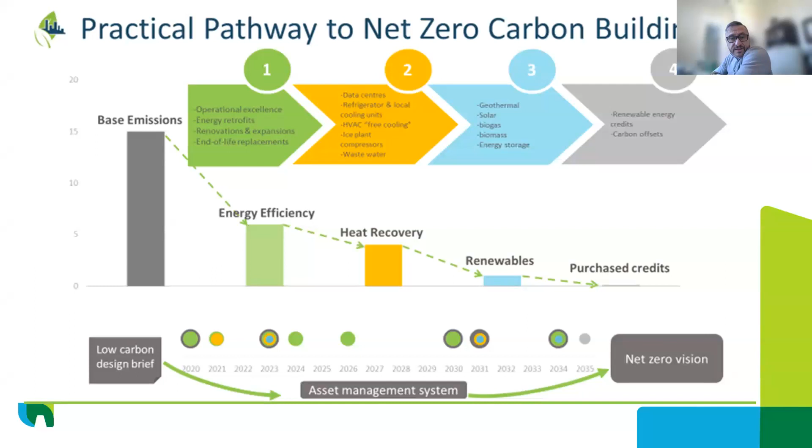So the objectives of the pilot started off with setting carbon reduction goals for these pool facilities. Each of the municipalities had slightly different goals, all meeting the minimum requirements for the FCM funding for feasibility studies of low carbon plans. We used a zero over time carbon approach, basically doing it over the 30-year period, and we presented a solution, one of the pathways that aligned very much with the equipment end of life, renewal and replacement.

In order to evaluate the low carbon opportunities, we compared it to a business as usual, and we'll get a little bit more into what business as usual was defined as here. Focus on an integrated design process, as Catherine touched upon, getting all stakeholders involved, not only from the specific municipality, but we had the opportunity to share experiences from different municipalities at each of these workshops, and it's important to get the internal buy-in from all people's perspectives. And one of the main focuses initially was to identify immediate operational improvements. Good. Next slide.

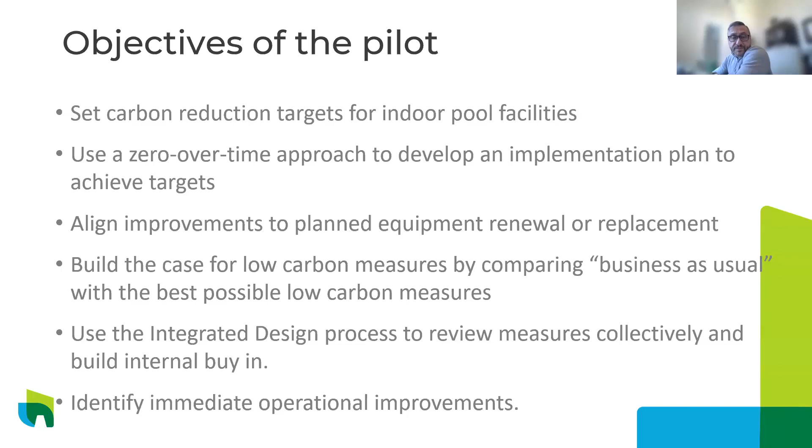The process first started off with some data collection. Before we went on site, we wanted to make sure that we had as much information as we could get, and review it, just to make the site visit more streamlined and more efficient. Once we collected as much information as we could, we performed a site visit to validate some of the information that we had collected already, but really getting to know the operations of the building. So interviewing the operators, interviewing the facility managers to really get an appreciation for how the building is operated.

Based on that, we came back and developed some preliminary measures, and we had our first integrated design workshop where we had lots of stakeholders, where we presented some initial ideas of the measures, to run them by them, get their perspective, get their feedback, and incorporate anything we perhaps hadn't thought of, as well as refining the measures to suit their specific needs. After that technical first workshop, we performed analysis and created costing and savings, and presented it to everyone, including the capital folks, where we presented the financials, and then final reports came out of that as well.

So that's the process. The overall findings, in a nutshell: net zero carbon emissions is achievable and financially feasible in municipal community centers with indoor pools. About 80% of the way there is fairly financially attractive. The last 10 or 20% can be not as financially attractive, but I'll highlight some of the areas that explain this a little bit better. It does require, again, planning in advance. That's why we look at a 30-year time horizon. And it's good to get everyone's feedback, because this is a long time horizon, and again, very important to get the findings and everyone on board. Next slide.

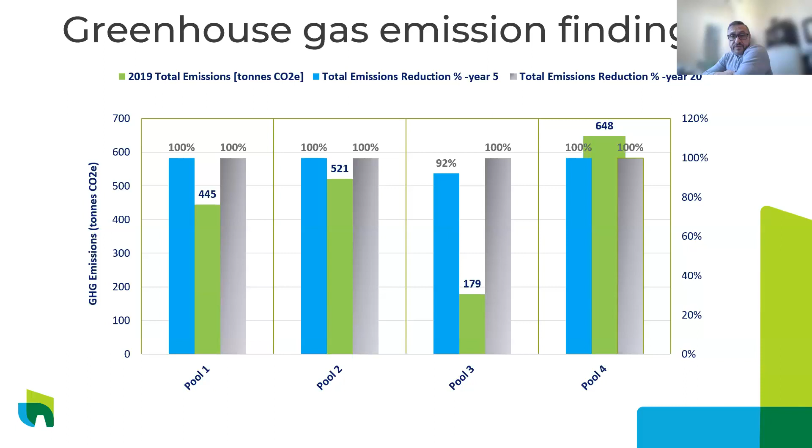So these are the four pools here, with three different bars. The green bars in the center are the starting emissions, the 2019 baseline emissions that we referenced. You can see there's quite a wide range, from 179 tons right up to 648, because the facilities were of varying types. We presented the 5-year and 20-year emissions reduction targets that we achieved through this, and you can see the 5 and the 20 are pretty well the same. The 5-year is a more aggressive plan, and most of the time it emulated the 20-year plan. So all achieve net zero in the 20-year plan, and most of them in the 5-year plan as well.

Good. Energy performance target. There's a 10-year target that we tried to achieve. Most municipalities had a specific target in mind, either 50% or 80%. The first bar in each of the pools represents the baseline. The blue is the electrical, the orange is the thermal. The bar below it is the target set for the 10-year mark. And you can see the biggest change from the first bar to the second in each pool is a focus on considerably reducing the greenhouse gas emissions associated with the gas side. That was pretty well consistent across all 4 facilities. Next slide.

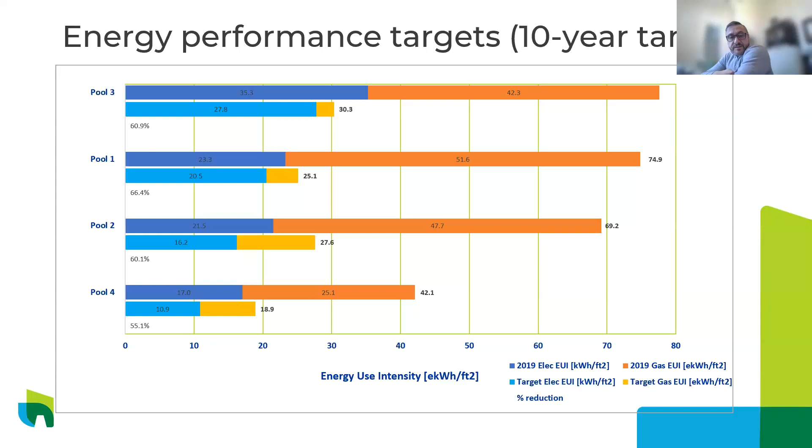Measure scenarios. To summarize, we developed 3 main categories of scenarios. There's business as usual measures, and then a low carbon approach with and without funding, as well as an aggressive low carbon approach with funding, which was the 5-year aggressive plan I talked about beforehand. We'll get into more of the details in the following slides. Next. Good. Business as usual measures: basically, it's just a standard like-for-like replacement of equipment at the end of life.

No optimizations of the existing systems were considered. Those are the operational things that I was talking to you about from a low carbon perspective. No heat recovery was considered, and no consideration made for any renewables as well, right? So kind of existing, continuing on doing what it normally does.

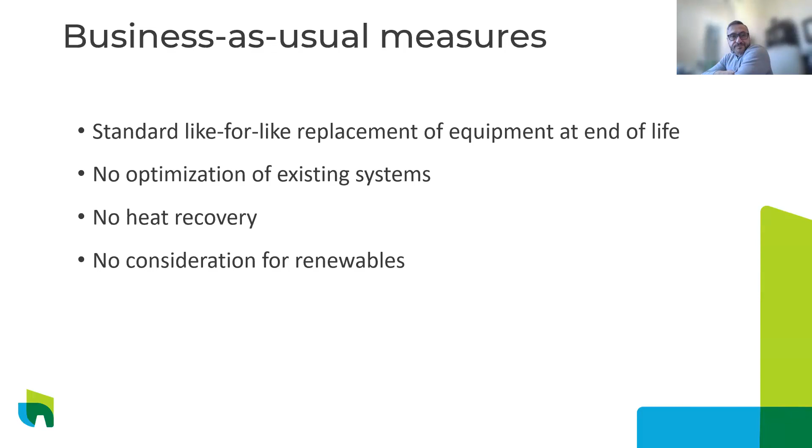Next slide. The low carbon approach without funding, identifying all different types of low carbon measures, maximizing efficiency, as we talked about, using heat recovery where it made sense, and really focused on replacing equipment at end of life, at least for the 20-year plan. The aggressive one, we'll talk about later, but that just condensed it all.

Includes implementing operational measures first, the importance of that we talked about, doing that first, get the most out of your equipment right now. And then we highlighted measures and identified them as part of the pathway that made technical and financial sense, or some that made financial sense right away, even though they were a little bit capital intensive. Next slide.

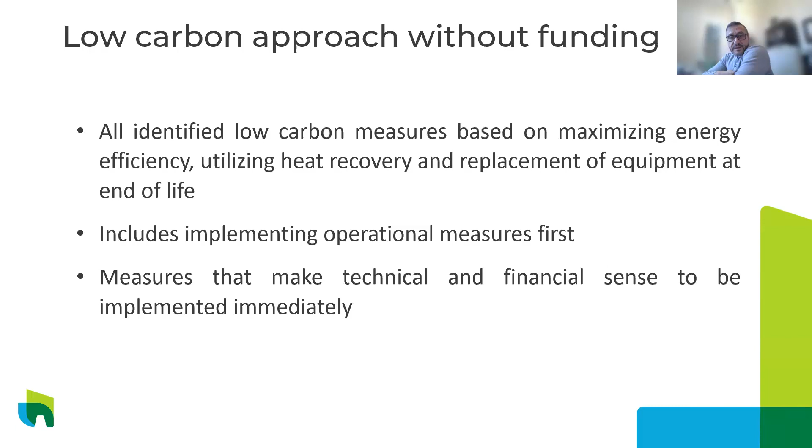Low carbon with funding is pretty well the same as low carbon without funding, but we ended up leveraging the funding that's available through FCM's Community Buildings Retrofit Program. So again, focused on the low carbon measures using that funding because that's what it subsidizes. So that was the difference between the low carbon with and without funding.

Now, in order to evaluate measures, the concept of life cycle costing is very important, and was relied upon heavily. The days of simple payback when looking at net zero just don't quite make sense anymore. So again, life cycle costing, just to recap, it's a decision-making process. You use life cycle costing, in particular net present value, which looks at the total cost of ownership, not just the initial cost, and not just a few years of cost, but over the life of the equipment.

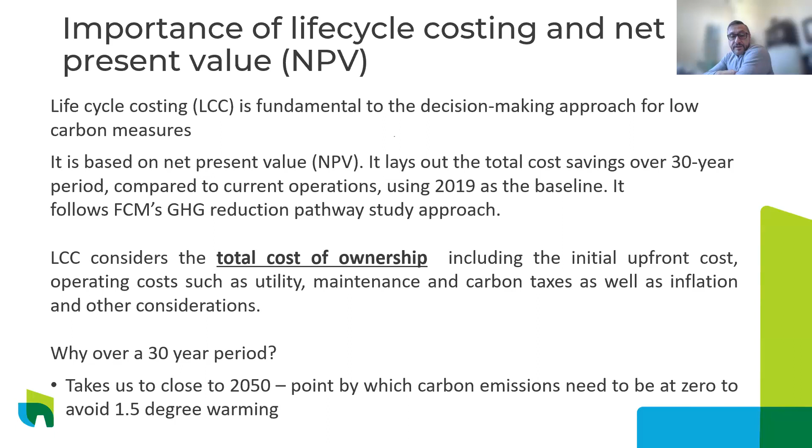And it takes into consideration utility, maintenance, carbon taxes, as well as other considerations, emissions reductions in the grid, and so forth. Emissions vary throughout the grid. We looked at a 30-year time period. The 30-year time period was chosen for a couple of reasons. One of them is because it allowed for replacement of any major piece of equipment at least once. And it aligns well with the 2050 target of emissions to be net zero that we're all aiming for to avoid the high temperature increase in global warming. Next slide.

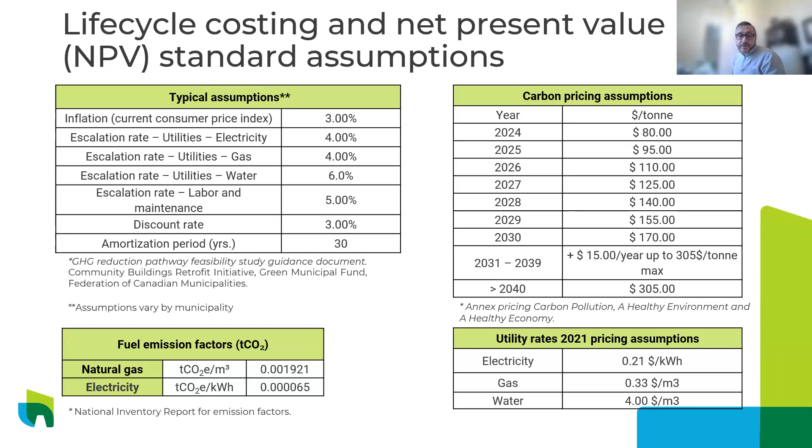We use the carbon pricing assumptions produced through the federal government there, and the fuel emission factors. These were the initial factors to establish the baseline, but in the analysis we ended up using the forecast for the emissions for the grid to take that into consideration, and we start off with the current utility rates that each of the municipalities are currently experiencing based on 2021 rates.

Good. Next slide. So this is just one sample of the measures. So again, we provided 3 different options here. We provided the business as usual, and you can see all the net present values for each of these systems that these measures corresponded to. They actually produce a negative NPV.

The interpretation of net present value in this case here is any change from the existing operation. So if there was any expenditure, like replacement of equipment, that's automatically a negative. If there aren't any savings associated with anything, then it remains negative. That's why, again, business as usual, you'll see all negative NPV.

The low carbon approach without funding has a variety of NPVs, and you'll see that some are positive, some are negative. The real comparison is the NPV compared to the business as usual alternative. As I mentioned earlier, in terms of financial feasibility, you'll see that not every single measure in the low carbon plan, especially heating and cooling, is there; it's still being worked on, and the technology is not quite there. It's pretty expensive.

That in isolation is not as financially attractive as the business as usual, at least in current days. But most of the other measures are. You can see that the net present value is either less negative, if you will, or positive compared to the business as usual. One of the things I just want to highlight is the renewable section. That one there, you'll see that the renewable shows a large negative. That is because we combined two things.

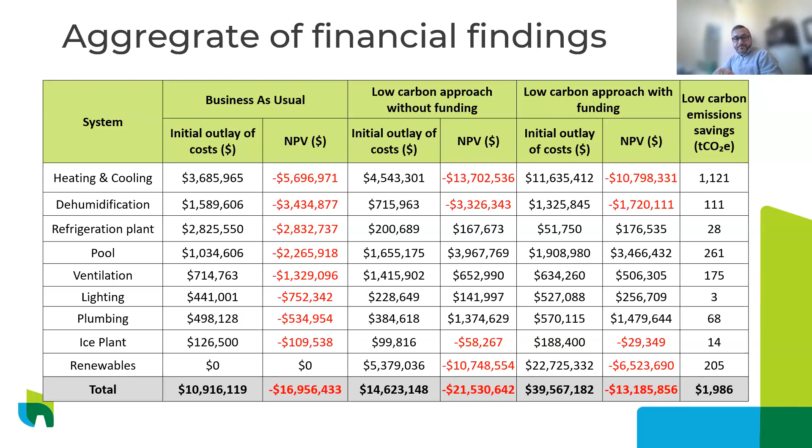We can look at the next slide. It talks about the low carbon with funding. And this one over here is similar to the one without funding, except that you reduce your initial cost significantly on the measures because of the funding that's available, and you end around the negative 3 million, which is close to the business as usual.

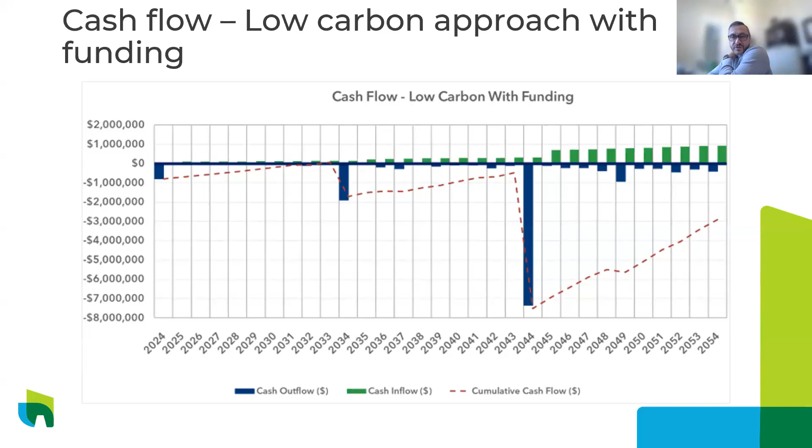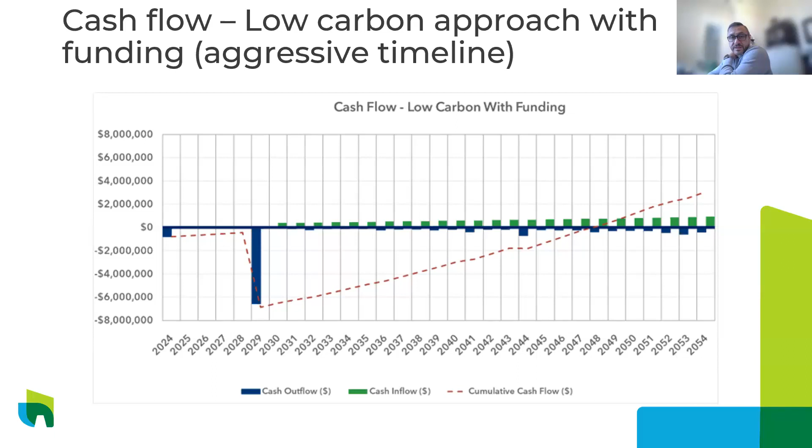So next slide. This here is just an aggressive timeline where we implement a lot of the measures within the next 5 years, and you can see that it kind of breaks even because a lot of the savings come through early on. They accumulate over the life of the 30 years. So again, this doesn't take into consideration the time value of money, but it gives you perspective on cash flow, which the municipalities were really interested in observing.

Good. Next slide. So again, a little bit more about the pools. We identified 4 participating pools in here, and you can see the square footage varying from as small as 20,000 square feet in pool number 3 to as large as pool number 4, which was over 120,000 square feet. We wanted to highlight the relative size of the pool.

Pools generally, from a square foot perspective of intensity, use more energy than typical regular space in community centers. So the relative proportion of it in the building is important in terms of understanding greenhouse gas emissions. You can see here on the last column, it varies from a small percentage, like 3.3%, to as much as 20% in pool 3. So you're going to see varying impacts of the pool measures on each of these facilities.

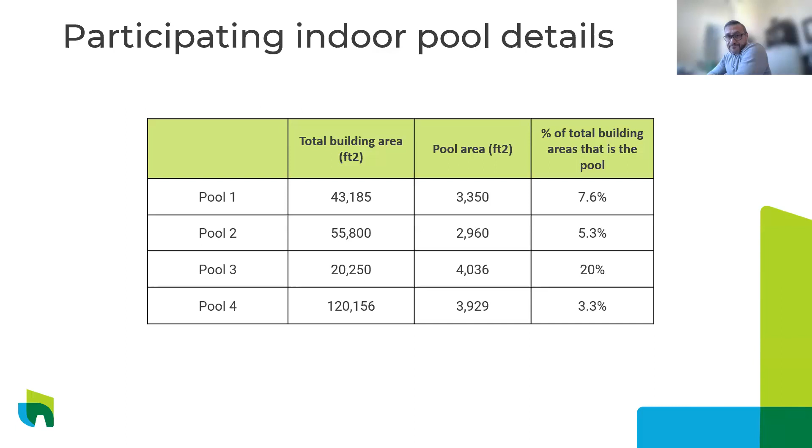Next slide. So there are a handful of metrics over here that are very important to look for opportunities that we'll talk about.

So first of all, we want to focus on the main pools. Each of the facilities had a main pool. Three of them, I think, had a teaching pool, which we'll talk about next. But we look at turnover rates. Turnover rates have to do with the pumping and how many times you turn over the water within the actual pool itself. And you can see here, again, from pools 4, 3, 2, 1, there's a wide range of turnover rates.

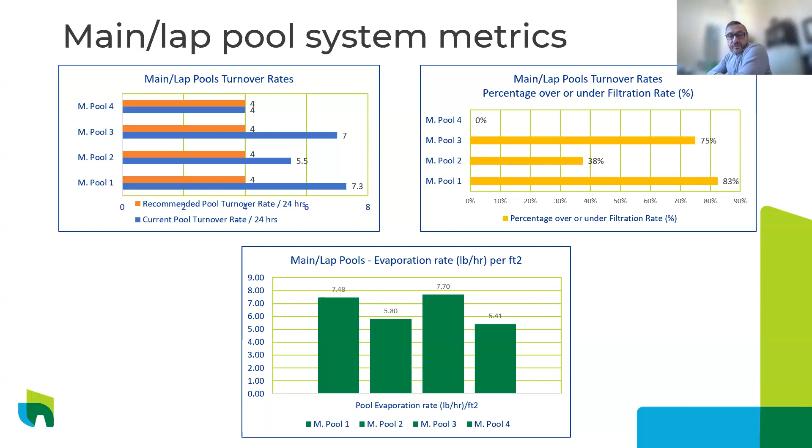Evaporation rate, you see the center slide at the bottom there. Again, wanted to highlight that there's quite a bit of variation within each of these pools in the amount of evaporation. We tried to normalize that on a per square foot of pool area so that we could make it comparable. But this wide range highlighted some potential opportunities. So on the ones on the higher side, we looked for opportunities in set points for air, water, and relative humidity. And we'll talk a little bit more about the guidelines we used for finding opportunities in this area. Next slide.

Leisure teaching pool system metrics. As I mentioned, 3 out of the 4 had a leisure pool associated with the facility as well. These have higher turnover rates, and 2 out of the 3 were again over pumping. One of them was just slightly in and around the break-even mark, but it was good information for them to know that they were just slightly lower and that they would try to increase that a little bit. Again, excess from pool 1 and pool 3 is showing opportunities for operational and efficiency improvements.

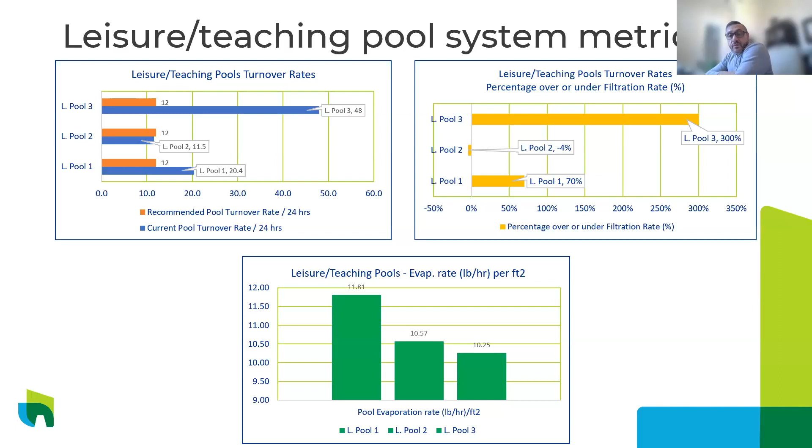The evaporation rates on leisure pools, again, show the wide range that you get over here. And you can see these are at higher rates than the main pool because the temperatures are higher in these types of pools than they are in the main pools, right? Okay. Next slide.

Just continuing on to some system metrics that again help identify some potential opportunities. All pools had mechanical dehumidifiers, which are essential in these types of environments that have a lot of humidity. We tried to normalize and make them comparable, so we looked at the air volume, the cubic feet per minute, the CFM, per cubic meter of air volume in the space, to see if we saw any deviation. You can see there's quite a bit of variation, going as low as 1.9 CFM per cubic meter to as high as 2.8.

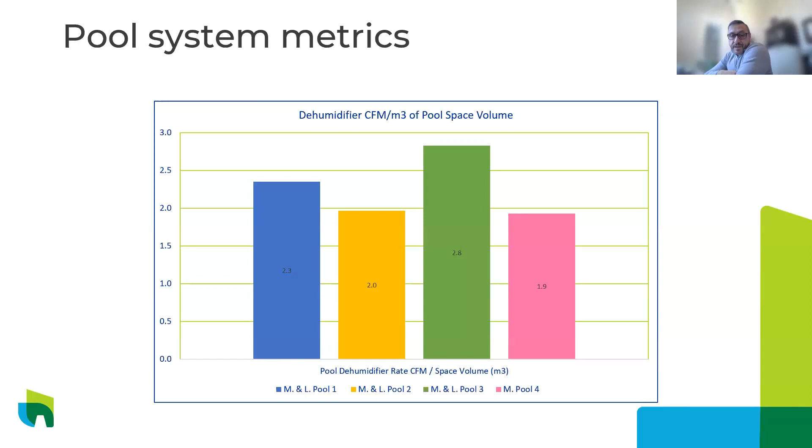What this showed us is that there were perhaps some opportunities to use VFDs with dehumidifiers, and one of the participants was actually in the process of a retrofit where they were replacing their dehumidifier, and they insisted on having the VFD, and we agreed. For this reason, there are opportunities to reduce the airflow, especially at lower dehumidification requirements. Next slide.

So we tried to get a bit of an indication of emissions reduction by pool and system. Lots of colors here, but I just want to highlight 2 or 3 different ones to show the relative magnitudes. By far, the heating and cooling, the blues you see, the first of the stacked columns, is the greatest. But it's important to note that the ones that also contribute quite a bit are pool, which is the orange, quite material on each one, not as high as heating and cooling, and dehumidification too, because dehumidification is associated with the pool.

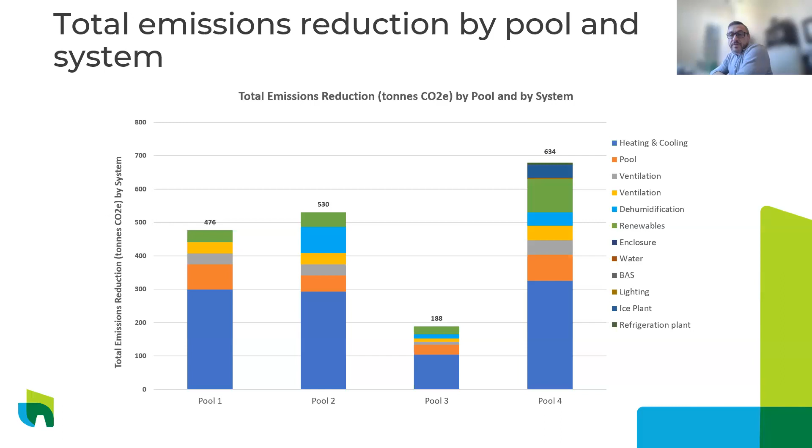So if you were to combine the dehumidification and the pool on each one of them, you get a significant impact. Not as high as the heating and cooling, but you can see how important it is to focus on getting the pool and the pool environment right as part of the whole building and reducing the emissions. Next slide.

So again, we looked at just the 3 facilities just to give you some perspective, make it more comparable. Typically where the emission savings occurred by system, again, we'll get into more of the details of the measures that follow, but again, heating and cooling was the big part there, and pools and dehumidification. If you combine those two, those would be good. And next to that would be just ventilation in the building as well. Again, ventilation is usually a big part of these. It's not as big if you didn't have a pool. So again, just trying to put things in relative perspective in terms of where the opportunities are. Next slide.

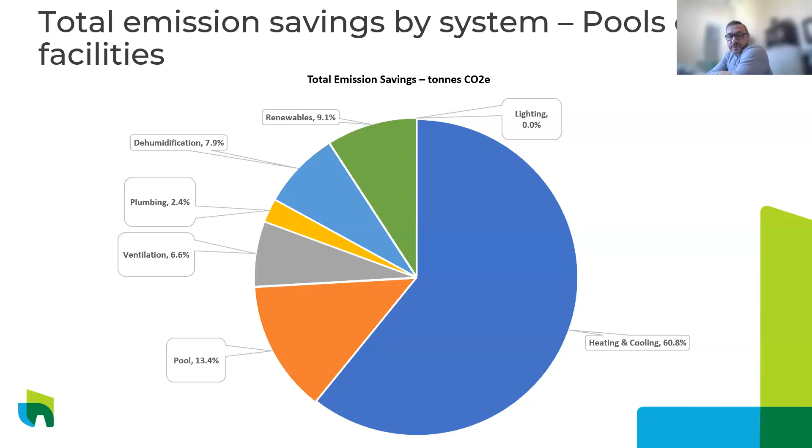So some recommendations that we'll make, and again, we'll get into a little bit more of the details of the measures, but for those that are considering performing a similar study in which there is FCM funding, some of the key things to keep in mind. What was really critical to the process is getting organized. There's a lot of information to gather, and the more information and documentation that you have early on just makes the whole process easier. Again, we talked about getting everyone involved with the integrated process. This is the way you get everyone's perspective, so you get buy-in and deal with it up front. So if there's any issues, you deal with them right away. So you get buy-in through all of the later stages in the process as well.

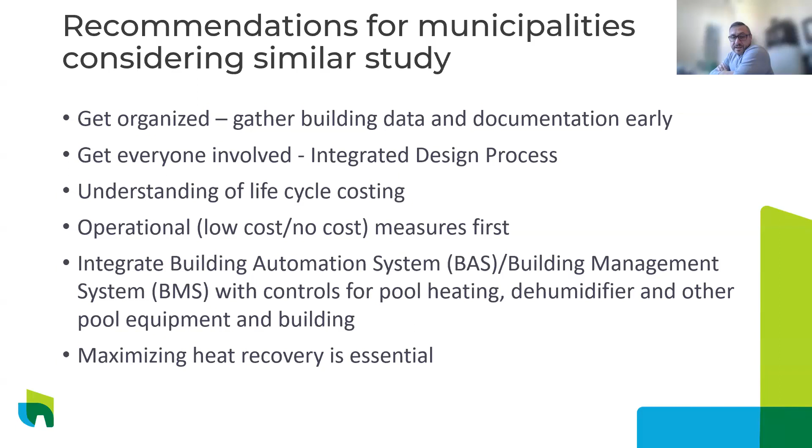Life cycle costing we talked about. Again, we talked about operational low-cost measures first. And so integrate those. BAS, building automation system, is really critical for getting to net zero, especially on the operational side of things. And so we were fortunate enough in these facilities, they all had some form of building automation system. But for some that don't, it's one of those things that you need to consider. And heat recovery, maximizing that is really essential in this process. Next slide.

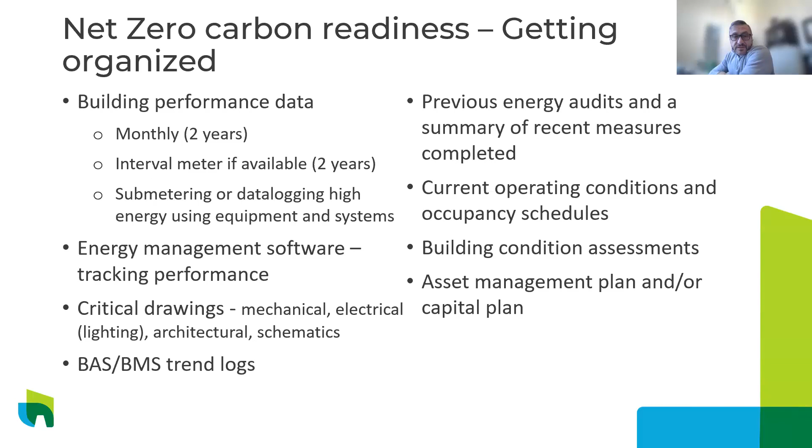Okay, so lots of information here. My understanding is we're going to be sharing the slide deck, so I won't go through every single little item, but just wanted to highlight some of the key pieces of information that are really important. Obviously, performance data, interval data if you have it, monthly data, and if there is some sub-metering. We were fortunate enough that there was some sub-metering in some of these facilities to give us some perspective on certain pieces of equipment. Just understanding if there was any tracking going on with any performance there. Drawings are really important, just so we understand the mechanical systems and the electrical systems better, so that we can make recommendations.

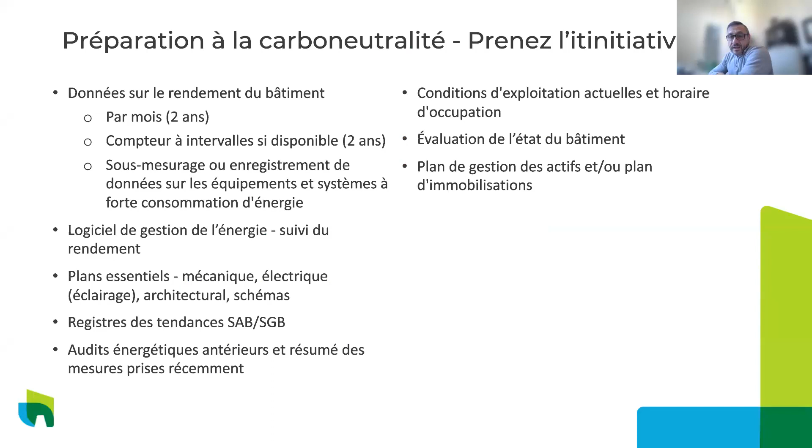If you're fortunate enough to have a building automation system, trend logs were important. Each one of these facilities had varying degrees of trend logs. Any previous audits, if they were fairly recent, just helped the process. Some of them had lighting audits done recently, so that was all useful in making the process more efficient. Understanding operating schedules and any building condition assessments combined with the asset management plan. Those two go hand in hand, as we mentioned earlier, since we try to align the replacements of equipment with low carbon alternatives based on end of life. That was one of the key, the normal 20-year time horizon pathways that we examined. So again, a lot of information, but if you get organized early on with most of this information, it just makes the whole process easier. Next slide.

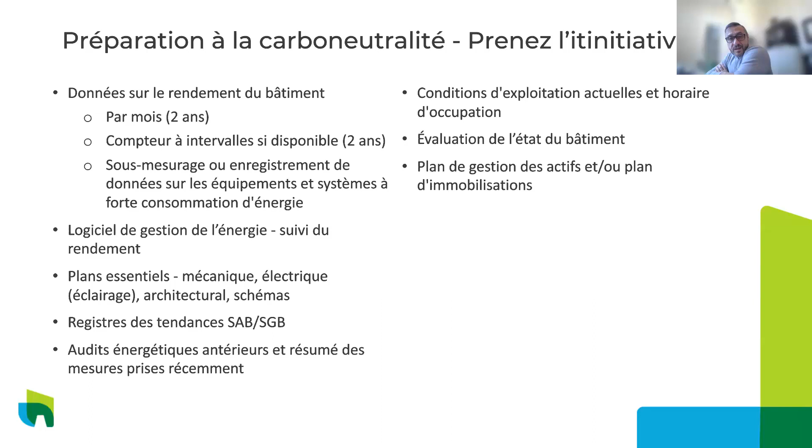Some of the measures that they weren't too crazy about, we tried to clarify and refine to make them suitable for them, as well as adding measures that were important specifically to that municipality. So again, here's the opportunity to get everyone's perspective. So you get questions and concerns addressed early on, making sure that it's comprehensive enough to address most people's issues, so that there's buy-in along the way. So again, very valuable meetings that will prove to be useful if you go down this path. Next slide.

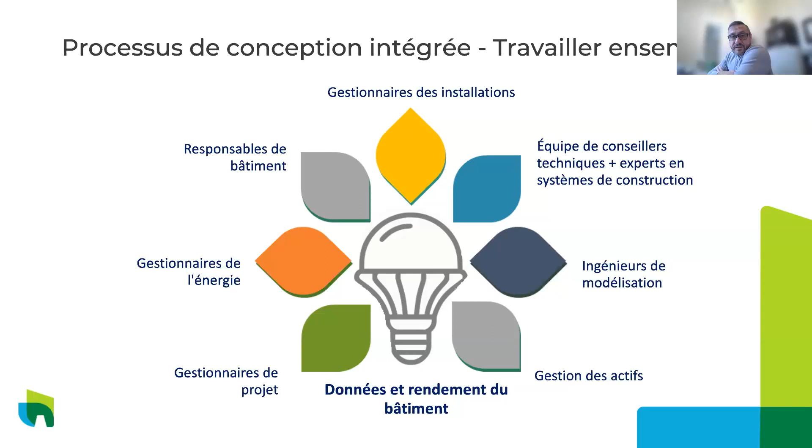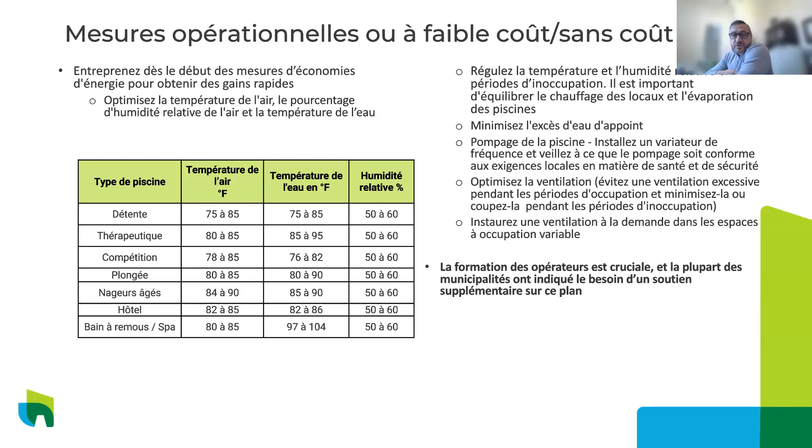So again, makeup water, we found that in some cases there was too much makeup water being consumed. Pool pumping, we talked about pool filtration rates. Again, an opportunity to install VFDs, optimize ventilation, good opportunity there. And we'll get into a bit more of the details of the specific items. And demand control ventilation was an option, not so much in the pools, but these are community centers. So many of these community centers had meeting rooms or rooms with variable occupancy. So a good opportunity there for saving. These typically don't cost that much. So we focus on trying to get these performed early on because there's low cost associated and usually pretty good returns with them. Okay.

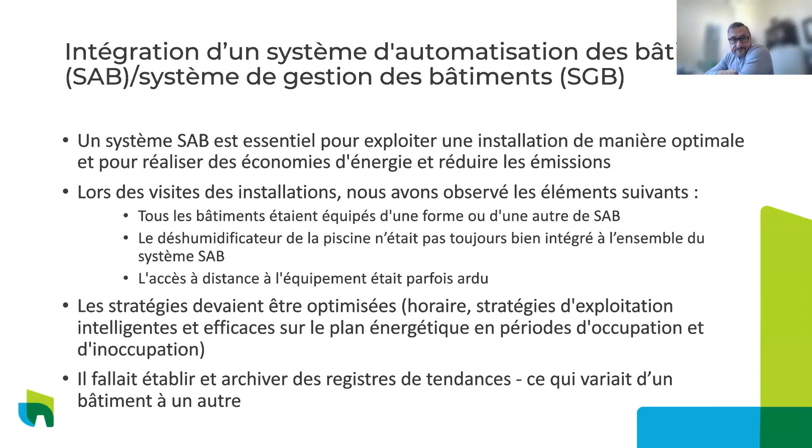Building automation system, touched upon it beforehand. BAS is really critical for smart operation of the facility. We're fortunate enough that every building had some degree of building automation system. Some of the observations: the pool dehumidifier was typically not integrated well with the rest of the building automation system. So again, opportunities presented themselves there. Strategies, sequences of operation, always opportunity there. Some of them had trend logs and archiving, but for the most part, we'd like to see longer and more archiving capability so that you can analyze things and watch trends, so you can fine tune your building. Next slide.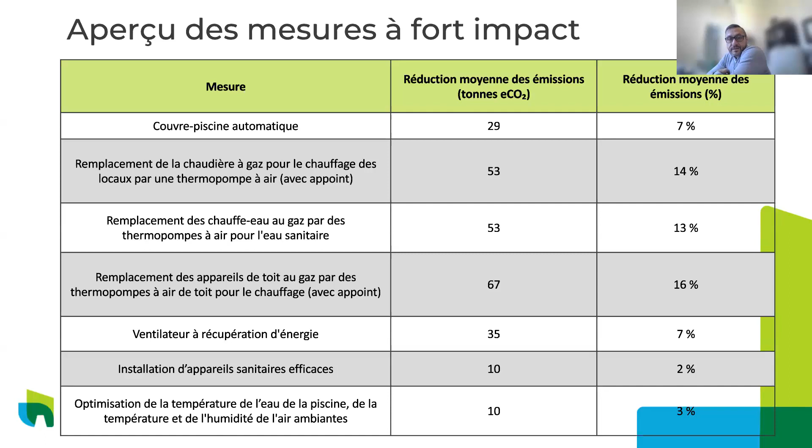So we're going to get into some of the key measures in each of the systems. We talked a lot about this, but I just wanted to break them up into categories that we've shown them beforehand. So again, the key measures in heating and cooling are replacing gas-fired boilers with air source heat pumps, using auxiliary heating. Same thing with gas-fired rooftop units. Same thing, just getting off of natural gas, and then opportunity for optimization of the rooftop units. So these are where you can make some of the improvements in the sequences of operation that we highlighted before. Next slide.

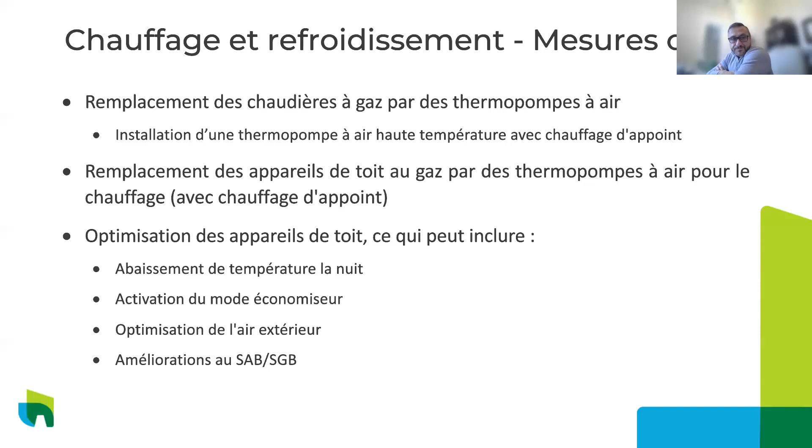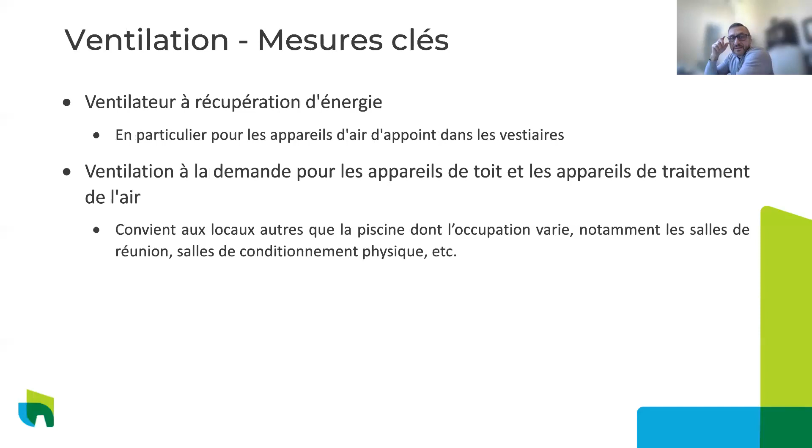Ventilation key measures. So again, energy recovery ventilator. I talked about that. There's usually a good opportunity here, if you don't have one already, to install one for the change rooms. And then demand control ventilation. We talked about that; ancillary rooms in these community centers often had variable occupancy. So there was an opportunity to use demand control ventilation and optimize the greenhouse gas emissions associated with those mechanical systems. Next slide.

Domestic hot water. Again, replacing the gas-fired heaters with air source heat pumps. We're seeing more and more of this. And again, you need to consider auxiliary electric heating, but this one is getting better and better in terms of the temperatures that you need to produce with the current capabilities of these. So there isn't as much of a need for backup as there used to be, but again, they're just getting better and better, so minimizing the requirement or the amount of auxiliary heating.

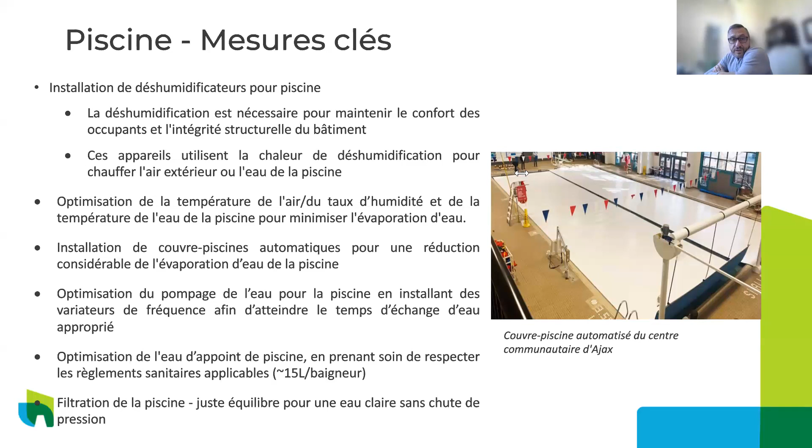Next slide. Swimming pool key measures. Again, we touched upon these a little bit, but just some of the key highlights. Dehumidifiers: a lot of the new dehumidifiers actually take advantage of recovering the heat from the exhaust air, as well as the pool dehumidification process, so that you can preheat the outside air that you bring in. Pool air temperature, humidity. That second main bullet there is about optimizing those temperature set points. That doesn't take too much to change, but really getting those right is important because you can significantly impact that.

We talked about automatic pool covers, because pool evaporation is one of the biggest energy uses in a pool. So if you put a pool cover over it, 90 to 95% of the pool evaporation can be reduced during that unoccupied period. Pool pumping, we talked about turnover rates. Again, we use VFDs for that. Pool water makeup, try not to exceed the local health regulations, and pool filtration, some minor improvements when considering replacing them with more efficient filtration systems that have reduced pressure drops. Okay.

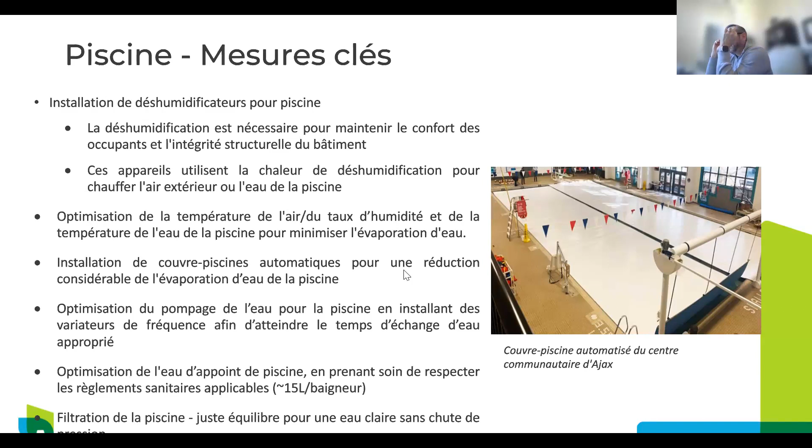So highlighting electrical measures and considerations. Typically, these focus on reducing electricity in the long run, so typically they don't save emissions, but you need to take all that into consideration. Some of the typical measures that were considered, mainly electrical in nature, were LED lighting and occupancy sensors. A bit of opportunity, but generally in these facilities that was done reasonably well. Active power management is something that we contemplated, considered and evaluated.

With a lot of new renewable resources coming on the grid, the quality of the power is going to be getting worse, and having some sort of power conditioning devices will help that. The ones that we were looking at deal with voltage regulation, phase adjustment, and do some power factor correction. These lead to more reliability of the equipment, as well as improving its longevity. So you correct all these different things, and your equipment tends to last longer. And there's always some energy savings associated with it. That will depend on the specific power that goes into this facility.

Electrical infrastructure, again, this one I want to highlight quite a bit. This is extremely important. Electrification obviously requires investigating electrical capacity and infrastructure with the LDC specifically. We're seeing more and more, depending on the location, feeder limitations, so the ability being limited. So this is the one to be really careful with, because these can be very costly, or in some cases the LDC is not quite ready to expand that. So something to consider, especially with the boiler replacement and auxiliary type heating.

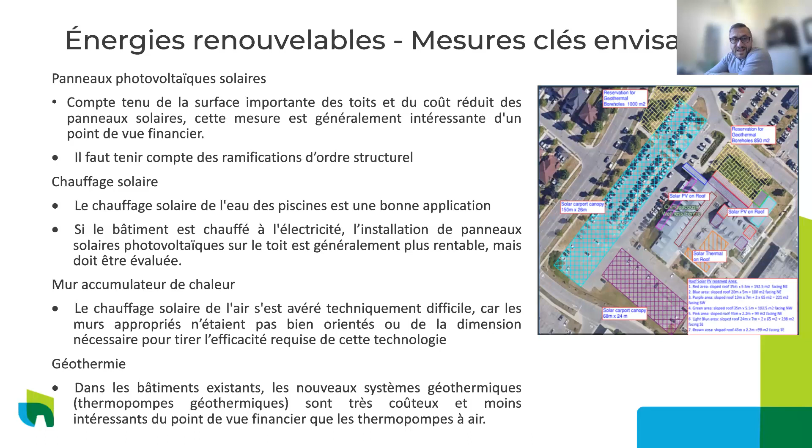Next slide. Other measures, again, we talked about plumbing fixtures, low flow faucets, shower heads can save considerable domestic hot water, and again, showers are used a lot in these facilities. So sometimes this is overlooked, but there's an opportunity here for reducing domestic hot water loads and saving reasonable greenhouse gas emissions. Next slide.

So some of the measures considered but dismissed. Again, we've been talking about them along the way, but just a bit of a summary. So, replacing gas-fired equipment with more efficient gas-fired equipment. We tried to stay away from that, and try to use more air source heat pumps. Replacement of gas-fired equipment with 100% electric. Again, air source heat pumps. Cold climate air source heat pumps are better financially from a utility cost perspective.

Solar thermal and solar walls we talked about. We just couldn't make it work really well. Geothermal, ground source heat pumps, again, too costly, at least we found in these projects, and usually for existing buildings, it's a little bit more difficult. And envelope measures, other than air tightness, weren't very cost effective, unless there was a need to do it, if windows needed to be replaced because they were broken or just falling apart. But generally, as a measure for greenhouse gas emissions, they had a high cost per emission saved.

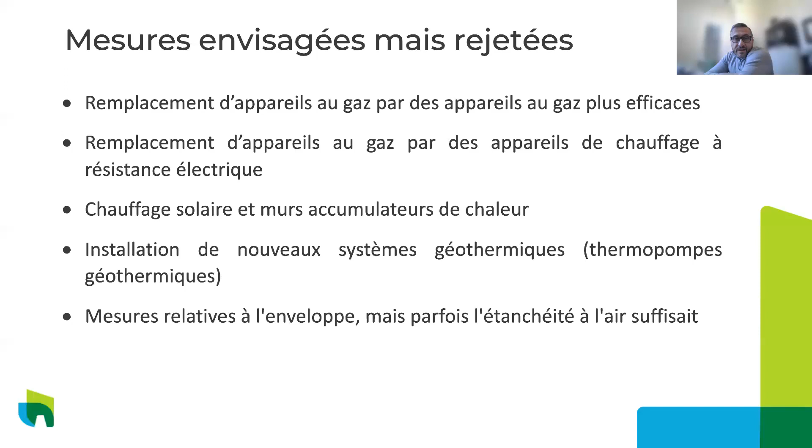I've talked a lot. Thanks very much, Frank, and appreciate all of this when you're struggling with your voice there today. So lots of technical information, and we have a lot of questions, which we will try to get to at the end. Although, Frank, if you were able to answer some in the Q&A, that would be excellent while you're at it.

So I now have the delightful privilege of speaking to our three municipalities that participated in the pilot with us. I have with me Adam McMullen from City of Barrie, Deepak Adhikari from City of Richmond Hill, and Curtis Dina from City of Brampton. So here are your experts, great people to talk to about specifics because they've been through this at least once or twice, and are now old hands at all of this. So we're going to get the opportunity to ask them a bunch of questions about the process.

And at the end, I'll open it up so you can ask them questions as well. So first, I am going to ask questions of all of them. So if everyone could give me a relatively short answer for each of the questions, that would be terrific. So I'll start with Adam from City of Barrie. Could you tell me what you learned through the study process and what were some of the biggest insights for you?